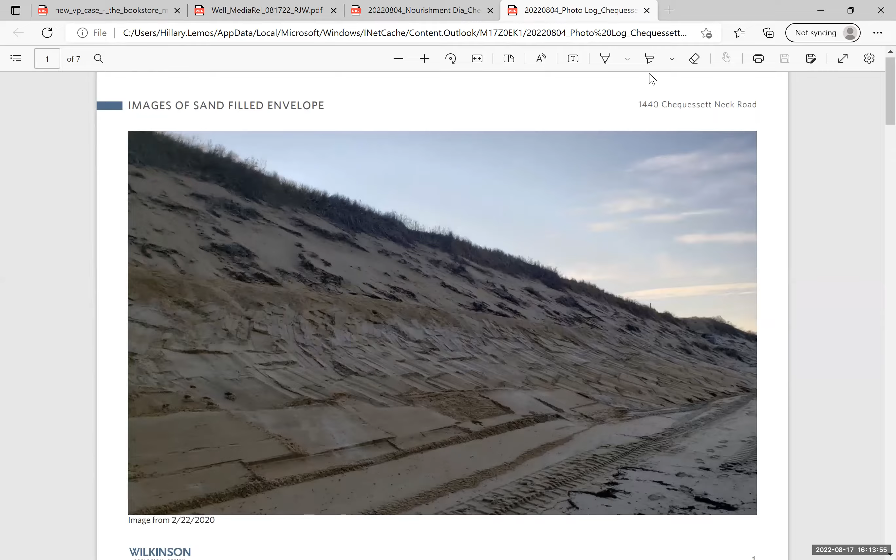Well, it's looking pretty good. It's been holding up as well as we expected, and it's doing the job. Have they seen any significant erosion at the top of the cliff near the house, as far as you know? Not since the envelopes have gone in and the bank became stabilized. I believe we have stopped the erosion for the moment.

Okay, glad to hear that. Do we have to vote or anything? I would just vote to allow the beach nourishment to commence, just so it's on the record.

I move that we allow the beach nourishment at 1440 Chequessett Neck Road. I'll second it. Michael, yes. Benjamin, yes. Marty, yes. Leon, yes.

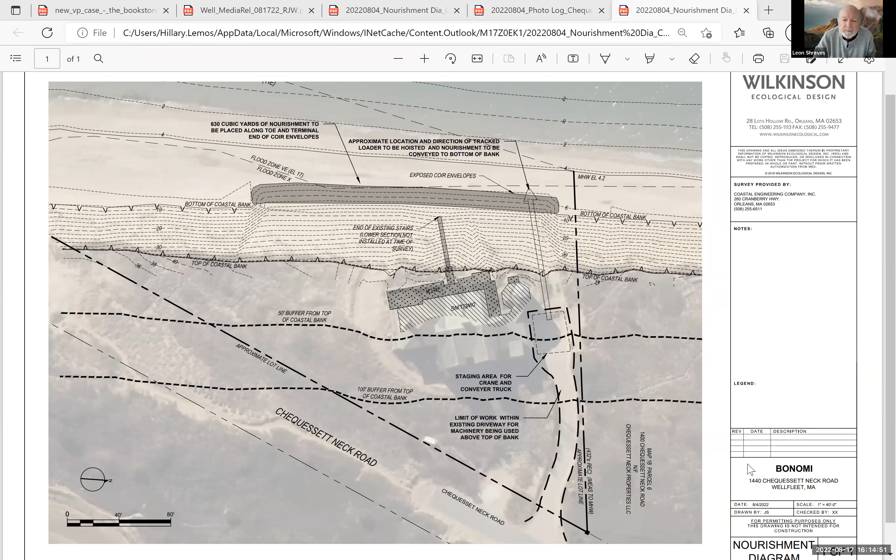Could you put up some silt fence along Chequessett Neck Road? I believe we had contractors driving farther toward the marsh side than we wanted in the past. So if there's a silt fence up, maybe that would prevent them along the edge of the road.

Sure, so just to be sure I'm understanding, that would be on the west side of Chequessett Neck? No, I was trying to orient myself with the north arrow. No, it's on the east. It's on the east. Okay, so the harbor side. Yes, yes, okay. It's always hard when it's not perfectly aligned north-south.

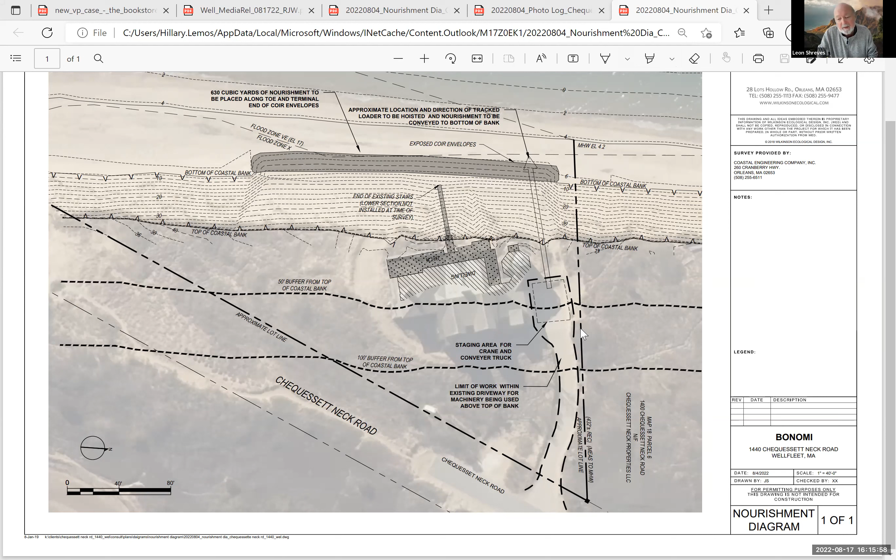We can put some silt barriers or staking there to make sure they're not driving into the marsh side. Thank you, I'm sure that'll stop them. All right, great. Thank you, Seth. Have a good day.

You too. So, do we have any mail, Hillary? You haven't had any mail, but I did email Ron Kielb, who had a jurisdictional opinion. He sent me a digital copy so we can undertake his jurisdictional opinion if and when you're ready. Why don't we do that now? Okay.

So, opening up his project description. This is on his property on the state highway. He would like to request the removal of two invasive black locust trees that are leaning and compromised due to the high water table. Unfortunately, due to the high water table and wet location of our property, as well as the notoriously shallow root system of the black locust, we have had a number of issues with our locust trees over the past few years.

In the past, we've had two large trees that heaved, one toward our home and one toward our neighbor's home on the south side of our lot, as well as two other large locusts that ended up falling—one of which was actually leaning toward our neighbors on the north side and was blown to our side by a strong windstorm.

We currently have 2 remaining compromised invasive black locust trees on our side yard that would pose a direct threat to our home during a nor'easter, and we would like to have them cut down before hurricane season.

We also propose to mitigate the loss of biomass by planting 2 native dogwood trees that will remain smaller and less imposing. Tree number 1 is leaning towards our home, with the majority of its branches reaching the house. This uneven weight distribution, as well as the high water table and wet location, put the tree at risk of seriously damaging our home if it falls.

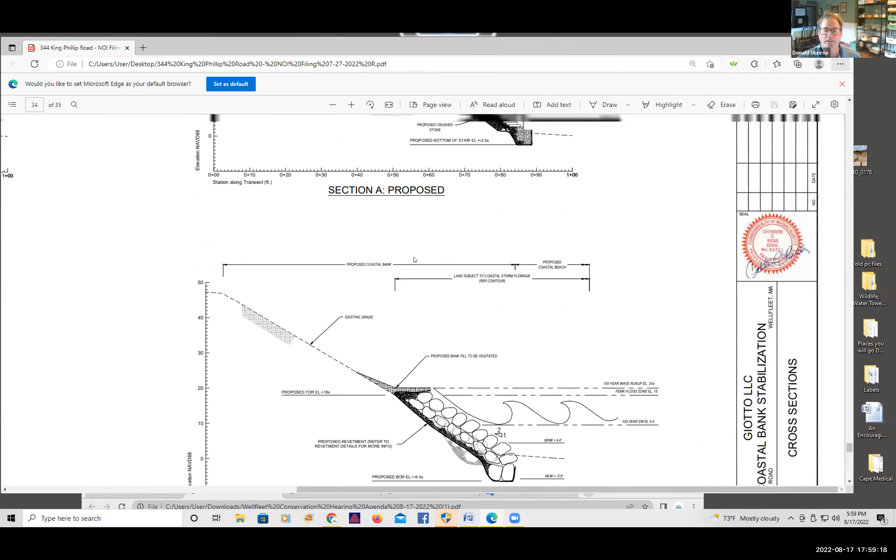Is that visible, folks? It's very small. Why don't you make it full screen and zoom a little? Yep, I will, once I get the plan up here. Is that better? Yes, and we have these too.

So just in brief, the current revetment — I know the folks from the commission looked at it today — is in its final stages of life from an engineering perspective. We did an inspection a number of months ago to get to this stage, where we proposed a change in not only the elevation but also the slope, so that we've got a 2-to-1 slope as proposed, or close to it, without affecting the upper portion of the coastal bank, which has vegetation on it.

In a close inspection of the revetment, it was built somewhere in the late 80s, early 90s, and the filter cloth used at that time was this fibrous white material that some of us are familiar with because we worked on these revetments back in those days. That filter cloth is in the process of complete degradation.

The reason we see some loss of material in potholes at the top of the revetment is because the filter cloth is no longer holding the sediment back. So rather than wait longer to address this, sooner is better, because we can salvage most of the vegetation that's up above, and plant vegetation above what we're proposing for the new height.

Let me close this out and see if I can get the photographs up. I'm not sure—are these showing up here? Yeah, it's still small, you see your whole desktop. All right, let me open it up a little more.

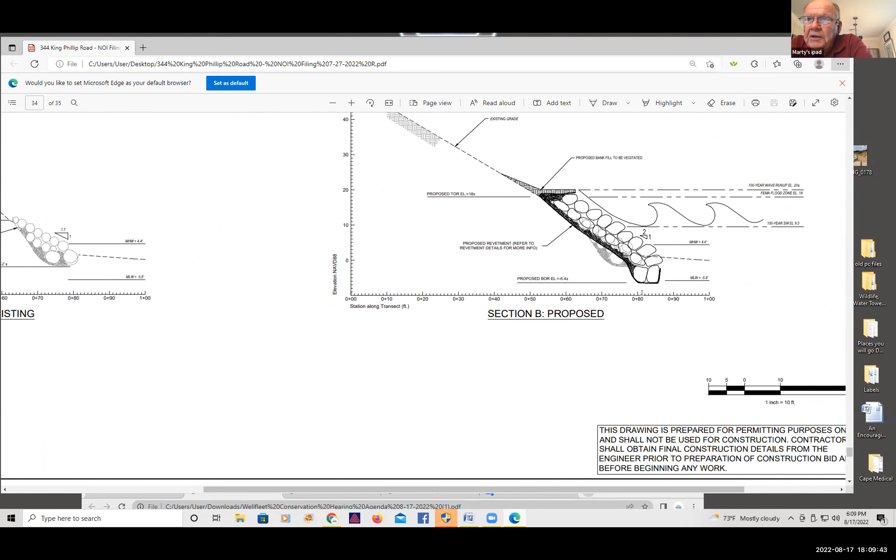Yeah, I just want to know how do you handle the filter? What are you going to do now that it's deteriorated? How do you put new filter in?

Oh sure, yeah. So the construction process isn't difficult - the contractor takes the existing revetment completely apart and puts the rocks behind him to protect him from the high water, then regrades the bank, the lower part where the rock is sitting now, and takes off any filter cloth through that grading process. He establishes his 2-to-1 slope on the back side of the revetment, on the now-exposed slope, and then lays out the filter cloth according to our specs, which is a Mirafi 5600 or better, double layered so it has a much longer lifespan. So we suspect this would be a 40 to 50 year lifespan on the new revetment.

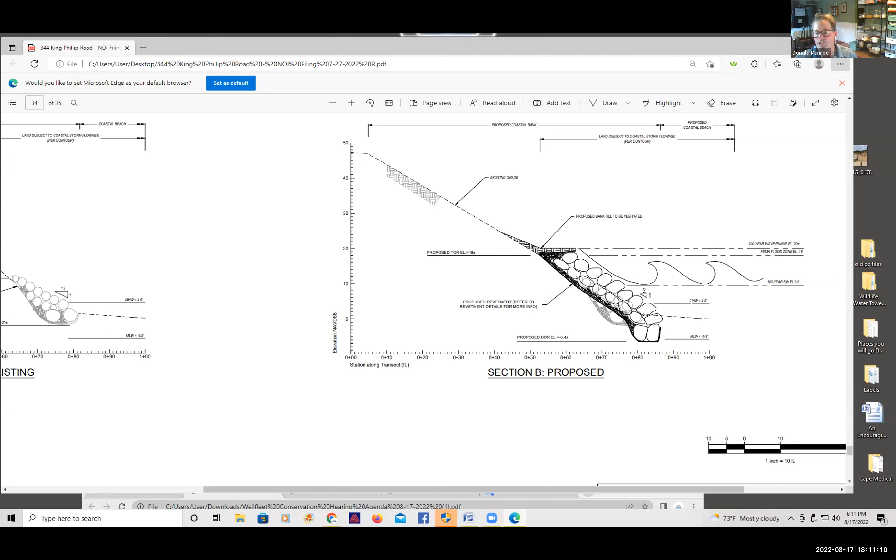Thank you. So through the chair, the toe in section B is slightly seaward - you can see - but we know because we're below mean high water, we have to go to Chapter 91. We have to get a state license to do this work below the mean high water line. But this is the first step to that.

Well, this is in a very sensitive area as far as sand migration. All the oyster beds are out there, and we've been having trouble. It sounds as though this actually ought to stop some of the migration because the sloughing of the cliff won't be washing out through the existing revetment. Is that a proper view on it? Yes.

That is the function of a rock revetment, and so there would have to be some mitigation for that because we don't want as much coming out as is now to affect any other resource areas, but some nourishment would have to be placed on the face of the revetment to replace the natural amount that might come out of this bank, based on the CZM transects, which I'm not sure if we have that calculation, Hillary. I thought we did, but I'll have to verify that.

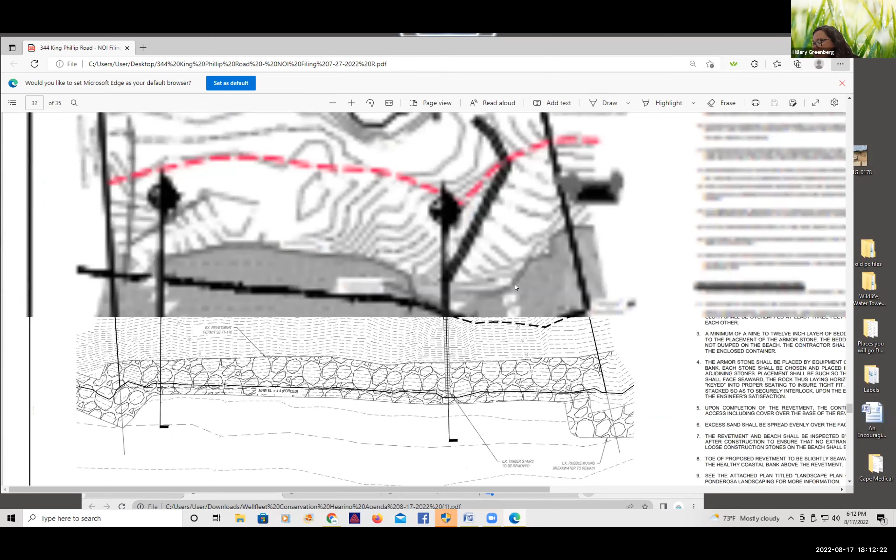It looks like on your project narrative, page A1, you talk about nourishment that was previously required, and then you have a revised calculation. Yeah, being 187 cubic yards per year, based on the 275 linear feet of the revetment from 1 foot to 18 feet, which is the height of the wall, and an average erosion rate of 1.08 feet per year.

Thank you. While you're on that page, under alternative 2, it says preferred alternative. Maria Brand, who's here, called me 5 minutes before the meeting and the two of us were panicking. No, this alternative 2 is not the preferred alternative. That shouldn't be there. We do want to reconstruct the access stairs, so it might just be a scrivener's error - obviously we want to construct the access stairs, but not the alternative related to the revetment construction in that paragraph.

Okay, and then a more substantial question: could you say something more about the way that on the left and the right, your revetment is going to tie into the existing ones? You say it's going to be higher. Are you going to start to get some sort of an end scour where the two come together, where it's running off yours onto behind theirs?

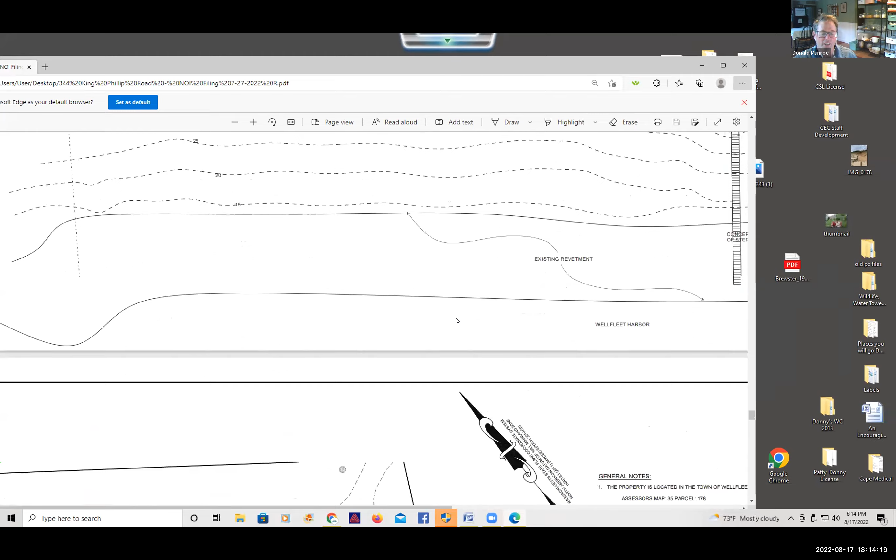Let's go back to the plan. That's a good question. Let's go down. First of all, just so Ponderosa knows we're covering theirs - this is their planting scheme that's at the top, and then there's planting over in here. If one of the reps from Ponderosa is there, we'll turn it over to them. Then right here is where that question applies.

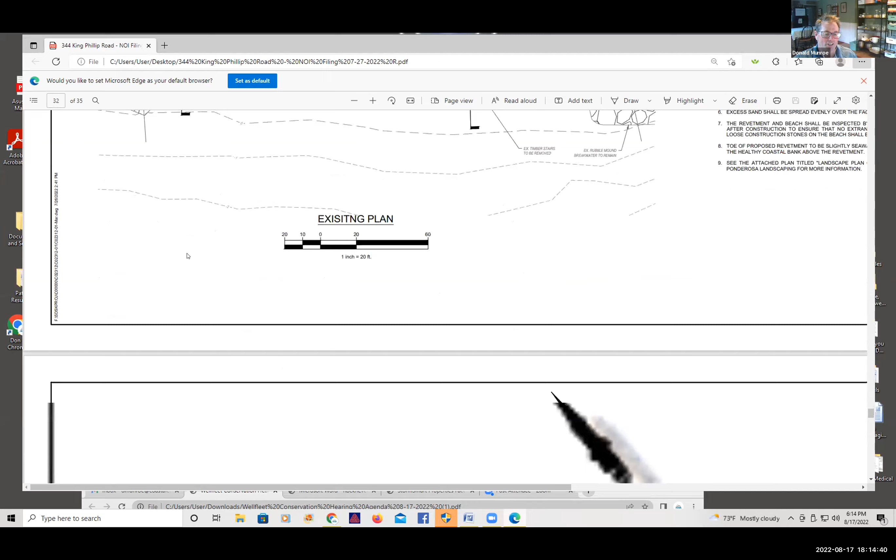Are you seeing my screen still? I'm assuming. Yes, we are. Yes, okay, let me see if I can get - okay. So the elevation difference between the two, maybe I can do better by going to the section right here. This contour here is roughly contour 18, and that contour bends down to here, so they're at like elevation 16, 17. So we're tapering ours well before we get to theirs.

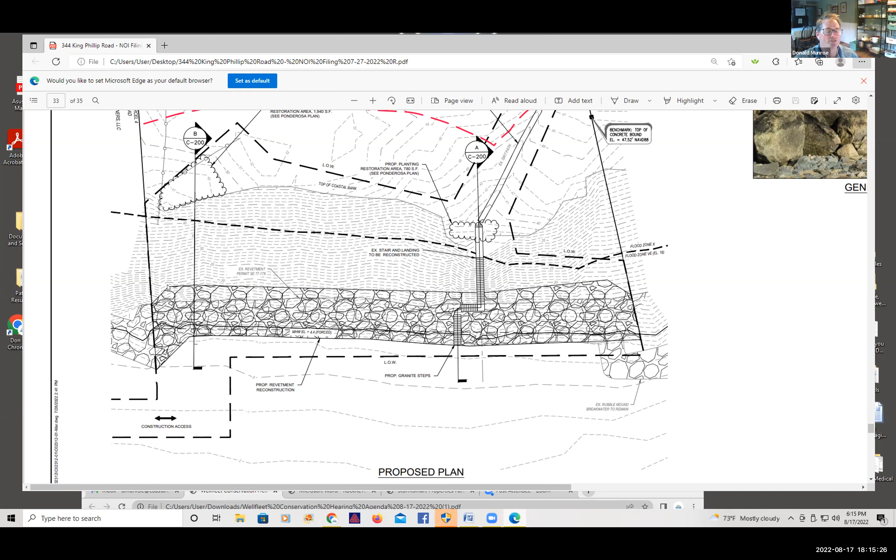So any end scour that might happen would be in this location, but that is heavily vegetated. And if that vegetation gets affected, then we would ask Ponderosa to heavily plant this area once we're done. So how many feet back from the property line is that, Don? That's roughly - well, hold on, let me see if I can find something that's relative. I don't have the dimension on there. Hold on.

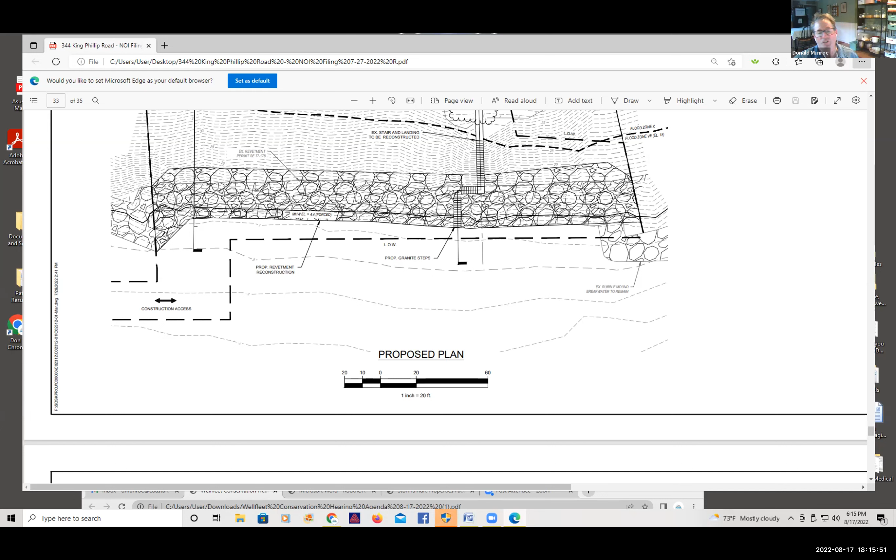Yeah, dimension at the bottom - that's a 10, it's roughly 10 feet. Seems to me like 15 might give a better buffer to the neighbors. We can do that. We can slope that back, actually pluck these rocks out and just go to this one here and make it 15. We certainly can do that, no problem. Does that address it?

And then the same - now over on this side, the elevation here, we'll do the same thing because they're at a little bit lower elevation than that. So we can do the same thing over here, just taper that back and then make sure that this is well planted through Ponderosa after the revetment construction.

And then that front revetment, those almost loose rocks there, they're going to be inundated, right? The water is going to be behind them all the time. Whatever is the function of that now, because I don't understand why it was ever constructed. I went back in the records to find out - yes, that's unfortunately, well, on the Brands property, we could... I'm not sure, we had really - that's a darn good question.

We can't really do anything, I'm sorry. There's a gap between the revetment and that unknown structure, is that right, as I recall? Yes, so water and sand can transport through there. Are you going to close that off? Is that what I'm saying here? We're not closing it. We're letting it remain.

We could remove the rocks on the Brands property, but that would leave this open. So I would say we should leave that alone so that any sediment that might come off will be trapped like a groin or a jetty and slow it down. I would rather not address this because its function right now for the neighbors, as well as a portion of the Brands property, is some kind of filtration barrier, like a breakwater. Good.

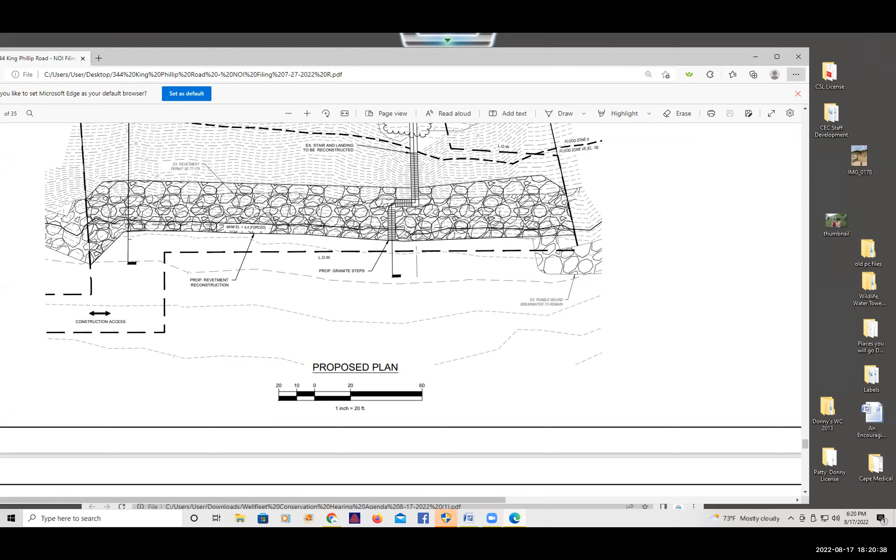Leon, can I? Yes, please do, Michael. Another question—we talked about this when we were on the site. The Brands have a shower on the deck toward the water, more or less where your arrow is up there, and there's no containment, the water just goes down. It's presumably got soap and all sorts of other things on it. We recommend whenever there's an outdoor shower like that, a layer of wood chips be put underneath it.

It's a fairly simple process, but what it does is stop the nitrogen from running down the cliff, and you were concerned about runoff exactly in that spot. So I would recommend making it a condition that the shower be fitted with a nitrogen-reducing wood chip layer. The Brands are here—maybe they could just chime in. Maria, do you? Yes, that's no problem, we spoke about this earlier and we're happy to do that.

Through the chair, was that Benjamin speaking? I think it was Michael. Okay, what I'm looking at too is the contours here—see, this is a 49, this is a 50, then there's a 49, so this is kind of a low spot where that dry well is. So with the wood chips you're talking about and us trying to address any loss of water in this direction, I think we might have that covered. Yes, I believe it would be a complement to that dry well. Yep, absolutely.

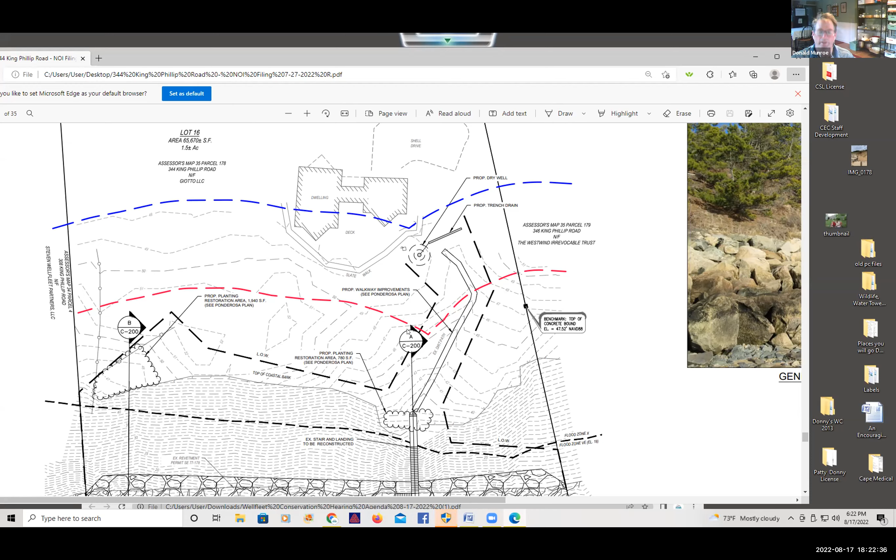Mr. Chairman? Yes sir, go ahead Mark. I've been very impressed with the engineer's presentation. I had a lot of questions about it after our site visit, but I think he's answered all of them. The thing that concerns me, when we were out there, is that staircase—that has got to be replaced. That thing is dangerous. Absolutely.

We have a section view of the stairs that are proposed. They're much safer—granite steps going through the revetment, we have to turn this to get this slope that's more gradual. It does go higher, but that's good for vegetation underneath, good for drainage.

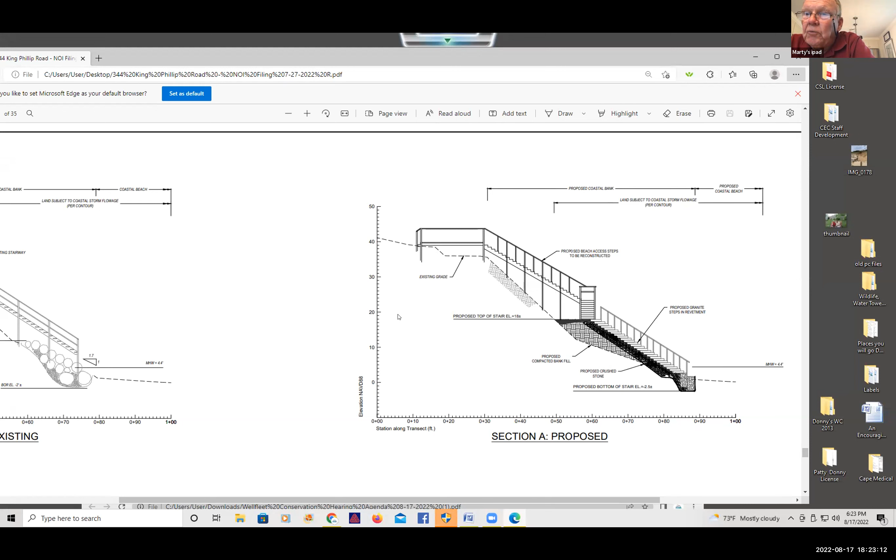It just is going to be an all around much better situation than what's there. The other question I had is on the path coming down. What are you going to do with that path? You mentioned that it's got to be improved, but what do you want to do with it?

Let me see if there's something on... is Ponderosa here? Yes, good. Can you speak to that? This is Charles Wentz with Ponderosa Landscaping.

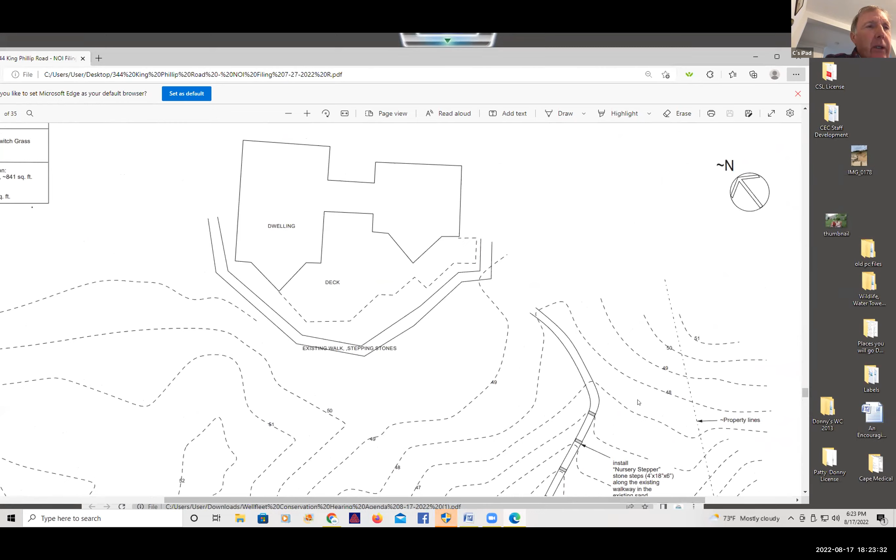It goes from elevation approximately 40 to 46 within 125 feet roughly, and we were going to install stone steps every approximately 15 feet. That would reduce the amount of water flow going down there. That's the theory.

So they're like earth steps, right? Yes, natural square cut stones, every 10 feet. They look like bluestone. So are you going to raise up the level of that pathway? No, it'll be about the same, just minor changes. However, the steps naturally fit in that length.

Did we, those of us who were out there, Marty and Michael, see any erosion along the edge of that path that ought to be addressed? Well, I think it looked like it'd been carrying water down. It's also because of the foot traffic, it will depress because that's the natural place where everybody walks. Over time it's going to depress, just like dirt roadways in Vermont depress. But the vegetation on either side, from what I recall, is still pretty vegetated, kind of hanging over into the pathway.

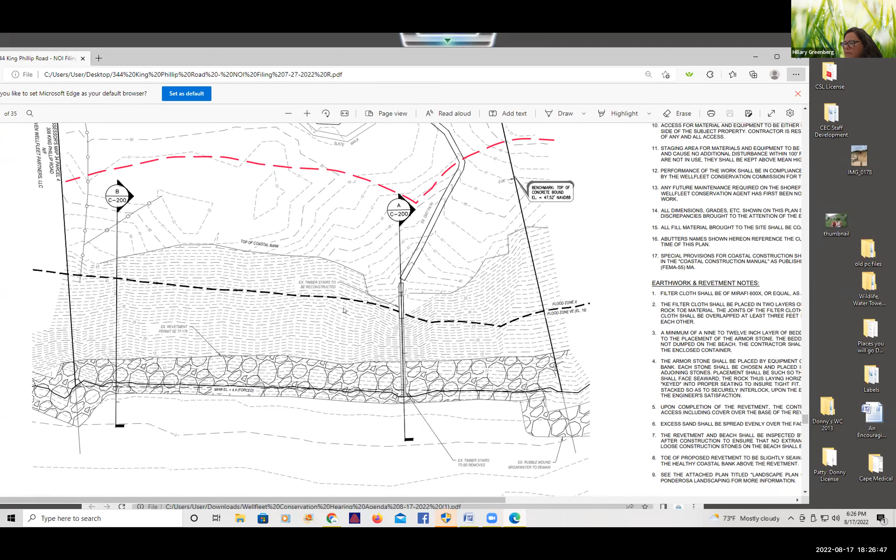Looking at the plan, I don't think you have all of the resource areas labeled, so I think we want to see a revision showing all the resource areas clearly labeled on the plan. I wondered if you had gone out and delineated the bank again, or if you just had this in your file. No, that's all been relocated, Hillary. We actually did a field survey.

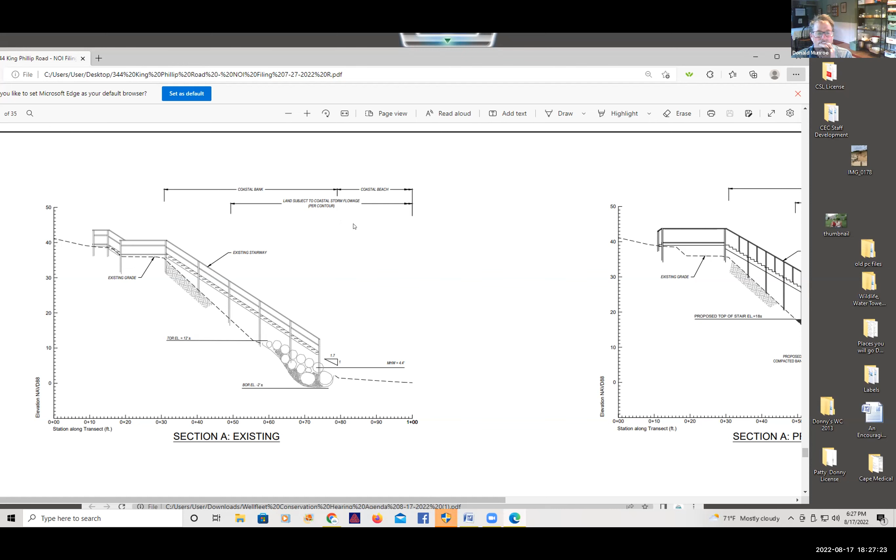Do you want the resource areas on the plan view? Because I've got the section view where we identify each resource area in the section, but we can certainly plot those lines on the plan view. I wanted to see it on the plan because it looks like there's some salt marsh out in front there, and it's tricky to see that. Oh okay, so I was hoping we could get those.

We need to talk still with our shellfish warden. She was not available tonight to review this with us, but I believe we do have shellfish resources right in front and all along the beach where the equipment's going to be traveling. So I want a chance to review that with her and see if we need to offer some mitigation for shellfish when construction occurs.

It looks like access is from Omaha. Correct, yep, which we've done in the past. Omaha is privately owned, I believe, but the town owns a piece of half of it. Okay.

So I just want everyone to be aware that the select board has a fee structure associated with use of town property and town landings, and you need permission to traverse that from the select board. That's a new policy they have in place, and it applies for construction as well as beach nourishment activities. So anytime you use those town landings, you have to apply to the select board and pay a fee.

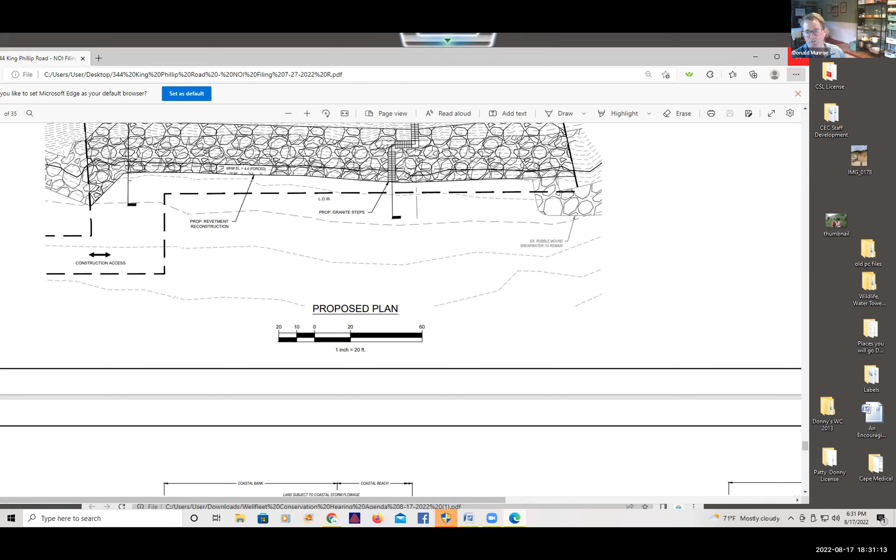So I'll show you a project done in Wellfleet where they went through a series of renditions, ultimately concluding that the revetment needed to be built to the FEMA elevation in this location. It's out on Old Wharf Road. I'm sure Hillary remembers it, the Spar property, which used to be owned by Pearson. I have some photographs and a field report related to that project.

The first photograph shows the results of a fiber roll array in a velocity zone with a drift fence. I believe that's the Glaze property at the end. This is Bob Berenger's property now, and this is the Spar property, but at the time it was owned by Mr. Pearson. They attempted to use fiber rolls in this location. Right next door, to the east, there's the Candell property.

The Candell property, at the time this fiber roll array failed, had a rock revetment at elevation 18. This was back in 2003. So they were at an elevation next door to what we're proposing at the Brands, when the FEMA elevation for the 100-year flood in this location was elevation 11. But that didn't have rocks below it, right? The Spar property? Not yet.

The next photograph will show what Denny was able to do, because the fiber rolls above, he was able to salvage and save them. He put a toe revetment in front of, or under, at the same slope as the fiber rolls that weren't totally disarrayed. That is at elevation 11. That lasted a little while.

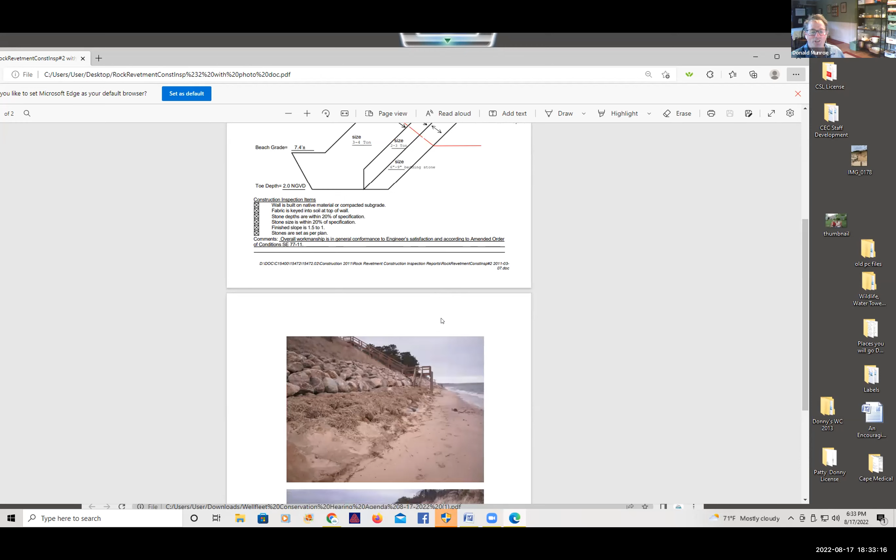If you recall, Hillary, that was back when Andrew Petty was working with you. So then, because of some additional failure, let me just get this up here. We applied to the commission. Let me see if I can demonstrate. I've got to make sure I have the right photograph, folks.

Yeah, that's it. Okay, so right here is the former fiber rolls, but there's rock underneath there and it has nourishment over it. We built on top of that and added to the elevation, not to 18, because you could see Candel's wall is back here, it's a little bit higher. This was brought up to elevation 16.

So even with the fiber rolls that Denny salvaged up above here, the water got behind this and caused this portion of the revetment to start drifting back toward the slope. It was only a couple of years, and we brought Andrew out to the site and explained what was happening, because he could see the change in grade of this covered rock revetment and realized we needed to add to the top. That fetch, on Old Wharf Road, is similar to the fetch at King Phillip Road. It's in a slightly different location, but the fetch angle is the same.

So we are very leery about trying to put fiber rolls above, when we did this back in 2011 with the Spire property. That's the reasoning behind it. We have an example of fiber rolls not really functioning the way you'd think if they're up high enough above what you might think is the wave activity. But in the winter, during storms like 2018-19, I'm sure they had an adverse effect on the Brand property, but no effect on the Spire property because this is all heavily vegetated still. So that's our reasoning—rather than science, just using a known good example of why we want to avoid that in this case.